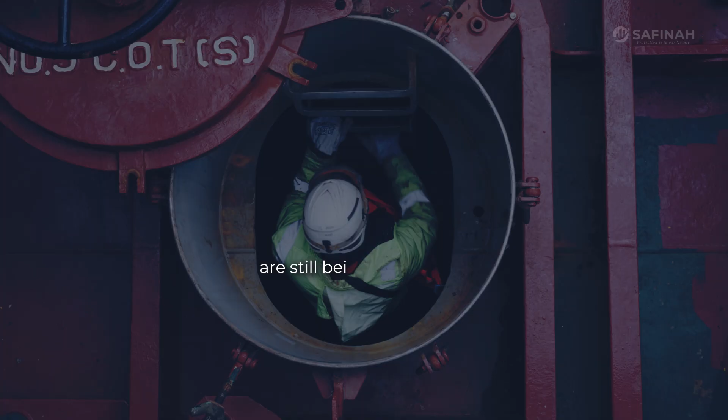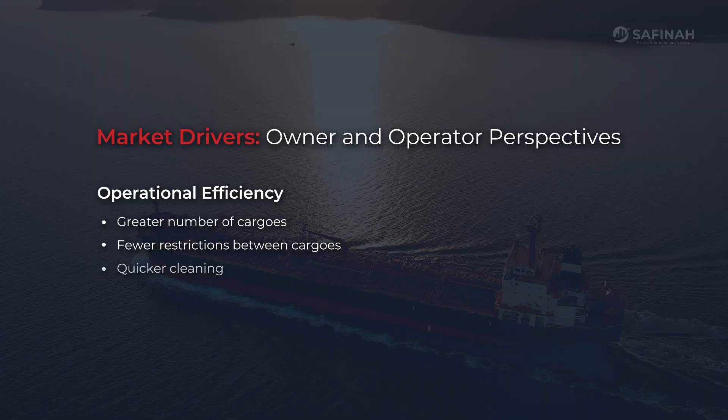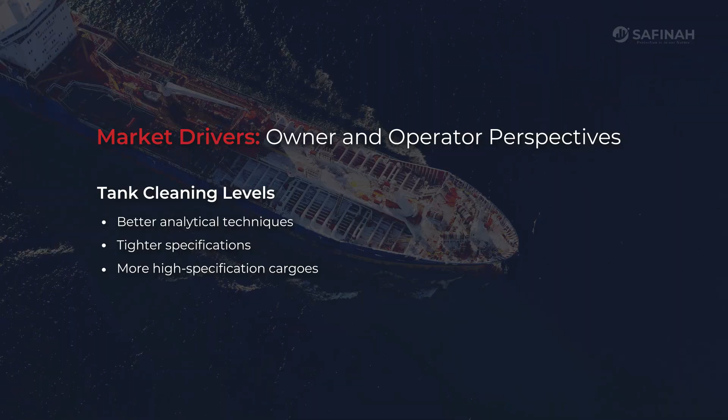Cargo tank coating failures are certainly on the rise. New cargo technologies are coming through, but the application and operational understanding of these are still being developed. From the owner and operator perspective, they're looking for efficiency in all vessel areas, wanting cleaning time quicker and not having to spend significant periods cleaning between cargoes. In terms of tank cleaning, there are better analytical techniques available to look for contamination. Specifications for cargoes are getting tighter. Tank cleaning is a science, but some options are either being removed or made more restrictive.

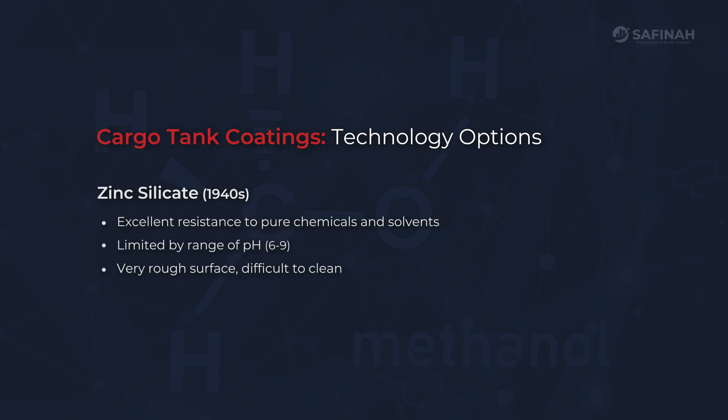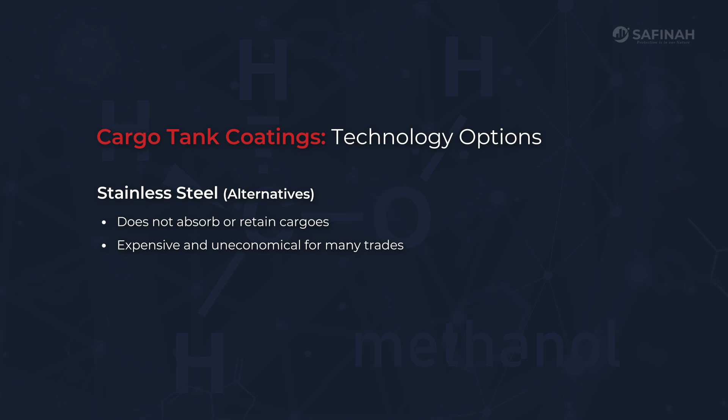In terms of technology options, if we go back to the 1940s, zinc silicates were an option. In the 1950s, pure epoxy systems came out. Phenolics came out around the 1960s. Low absorption coatings were brought out around the 2000s. The only real alternative is stainless steel. It's great in that it doesn't absorb or retain cargoes, but it's extremely expensive.

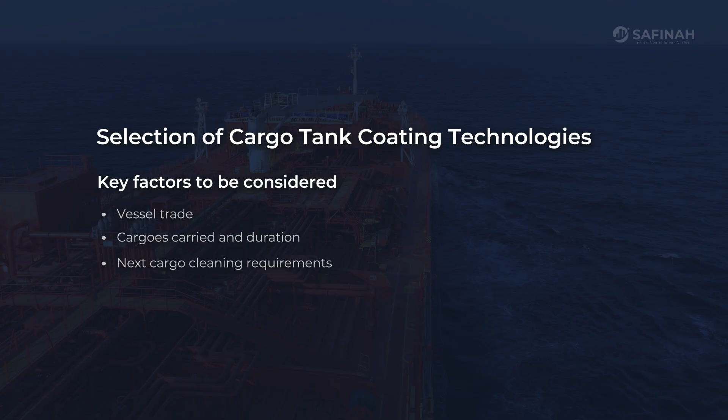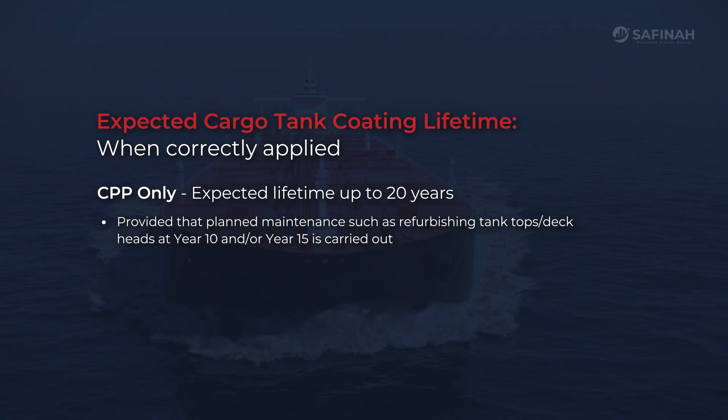Selecting the cargo tank coating technology really depends on what you're doing—your vessel trade, what cargoes you want to carry, how long you want to carry those cargoes, and the cleaning requirements between cargoes. You can move up the technology ladder from zinc silicates to epoxies to phenolics to low absorption coatings. Generally you'll increase performance, but also increase cost and application difficulty. In theory, assuming correct application, the expected lifetime is around 20 years. If you're carrying chemicals only, probably 10 years. If you're doing petroleum products and chemicals in between, lifetime is probably around 15 years.

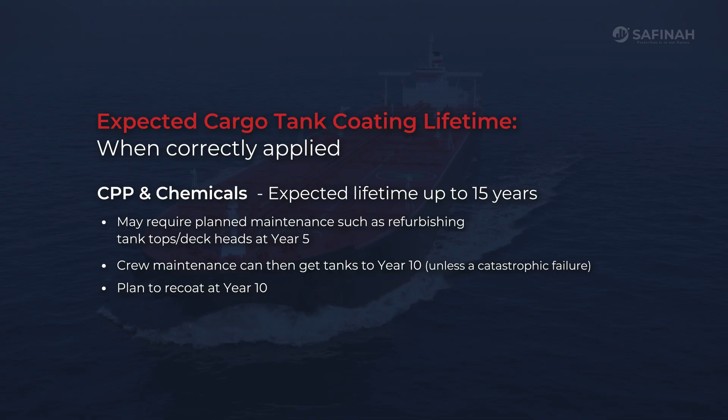In Safinah, we do independent expert advice on coatings across all vessel areas, but it's interesting that around a third of our work concerns tank coating issues—cargo tanks at 30%, a significant number of failures we see. In terms of cargo tank failure investigations carried out, you can see a steady increase from 2014, peaking around 2020, but continuing over the years to be somewhere between 10 to 15.

Of all the failures we've looked at, around 41% found contamination under the paint flakes and/or poor surface preparation—either grit and contamination or poor surface prep in terms of power tooling—occurring in over 40% of the failure investigations we've looked at.

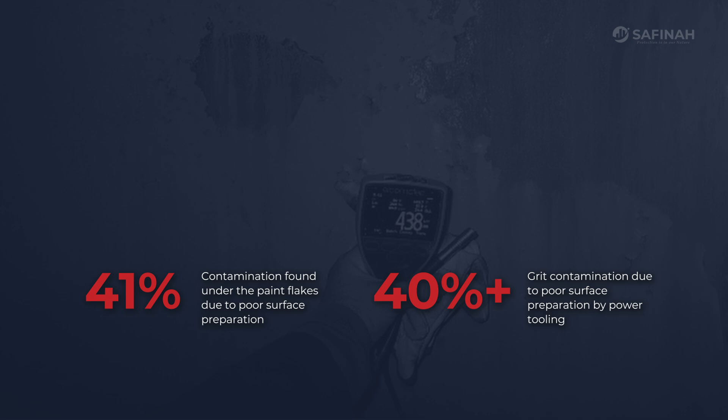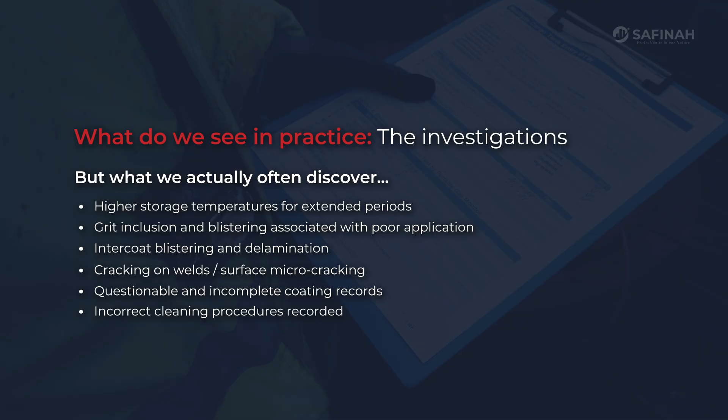In the investigations into these failures, documentation generally shows cargoes are mostly being carried according to the cargo resistance guide. A number of red flags are worth checking if you're an owner or an insurer regarding the risks you may encounter.

Surface preparation, coating application and curing are critical to in-service performance—you need to get it right when applying the product. Is cargo compatibility and the cargo resistance guide being followed correctly? There's potential for cargo contamination due to absorption and desorption, and how long that desorption may take. Over-cleaning between cargoes can cause significant problems, as can excessive heating of cargoes. The latest generation of tank coatings have a lot of internal stress because they are highly cross-linked structures.

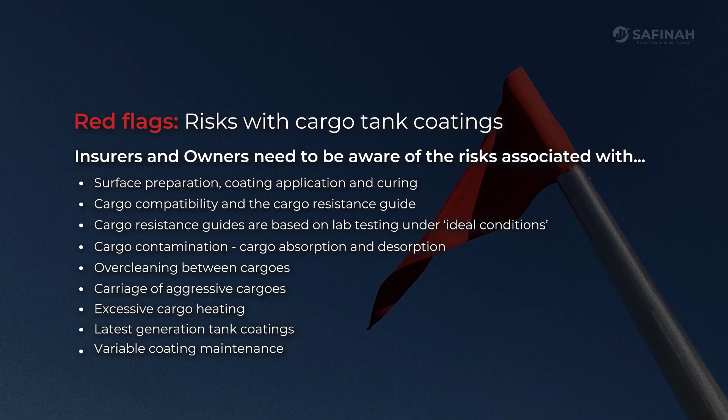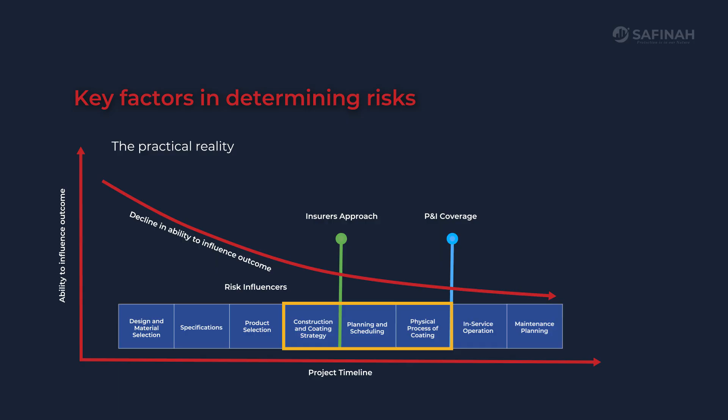In terms of coating maintenance, we see variable levels carried out by the crew. If you get in early, you can influence these risks. But when insurance and P&I coverage come in, typically the products have already been selected, the coating strategy already decided, and the physical coating process already completed. By that point in the chain, the ability to influence how the product performs in service is almost non-existent.

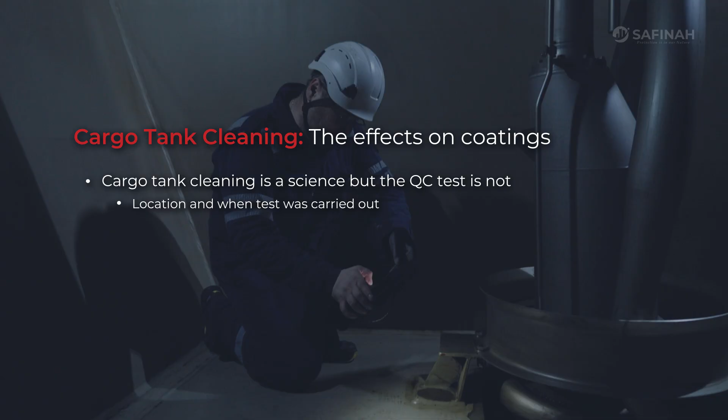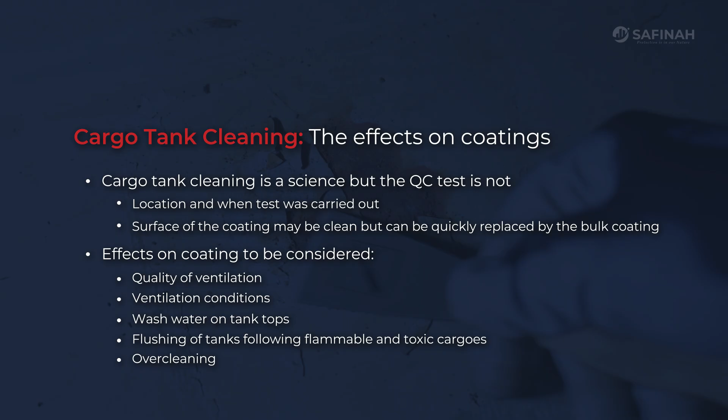Cargo tank cleaning and its effect on coatings—the QC test generally used, where and when do you carry it out? The surface of the coating might be clean, but the bulk of the coating may still contain cargo. So you might get a pass, but further down the line that cargo comes out of the bulk coating and you could end up with contamination, even though you passed the methanol wall wash test.

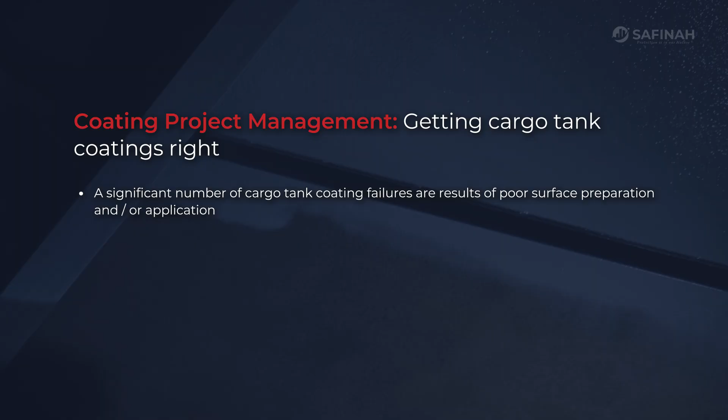Coating project management—getting this right is something insurers or P&I providers should be keen to ensure goes well. A number of cargo tank coating failures were due to poor surface prep or poor application, either as the primary cause or a contributory factor. Having an experienced project manager is really important to ensure the selected coating is correctly applied and in accordance with the paint maker's application guidelines.

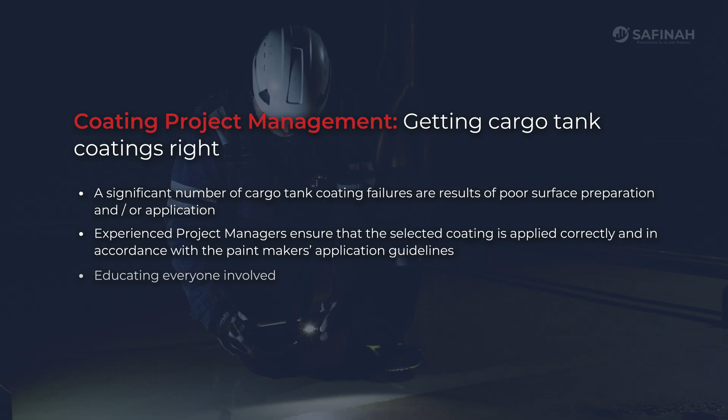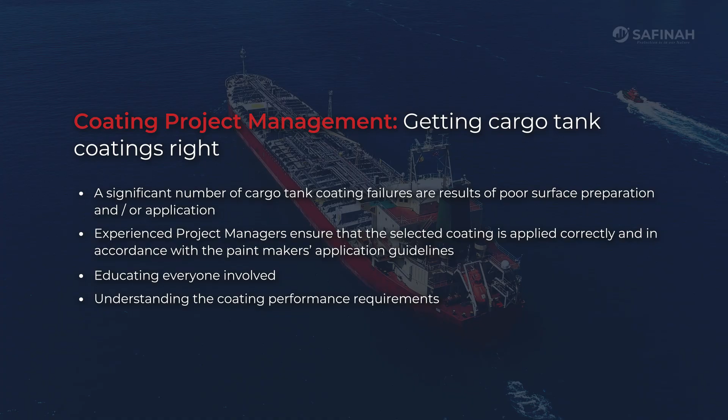Education across everybody involved is key. Charterers and vessel management need to understand what coatings are, what state they're in, and what they can actually carry—and insurers need to understand this too. Look at what you actually want from the coating: understand the performance requirements, what cargoes you want to carry, what application constraints you have, what constraints a particular product carries, and what operating conditions you'll be working under.